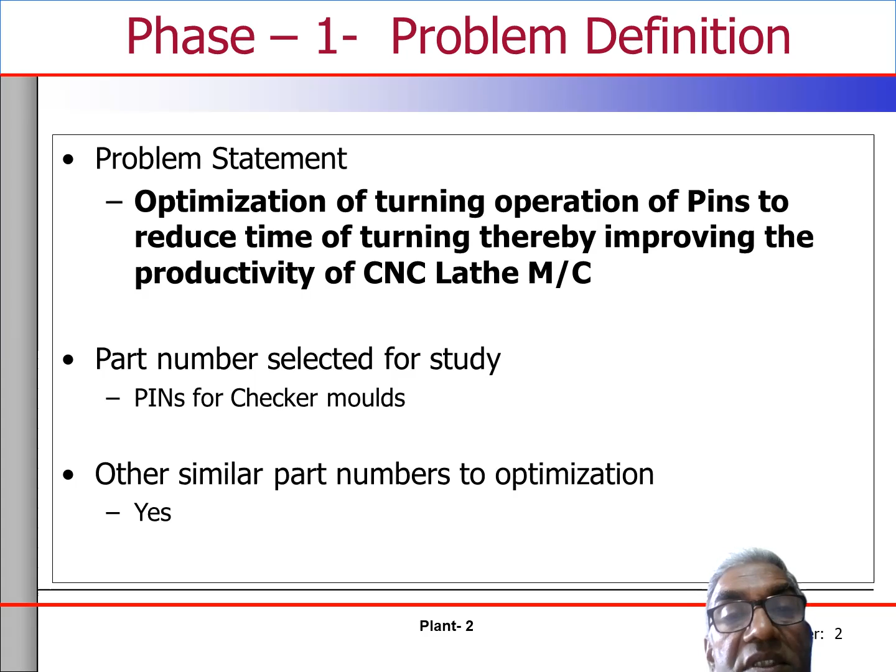So what is the objective of the project? It was optimization of turning operation of pins to reduce time of turning, thereby improving the productivity of the CNC lathe machine. We were manufacturing these high carbon, high chromium pins for our plant, done in a CNC machine. However, this turning operation was taking a long time, so it was decided to take up this Six Sigma DOE project to reduce this time so that we are able to meet the daily requirements of pins for that operation. A little later I will explain what these pins are.

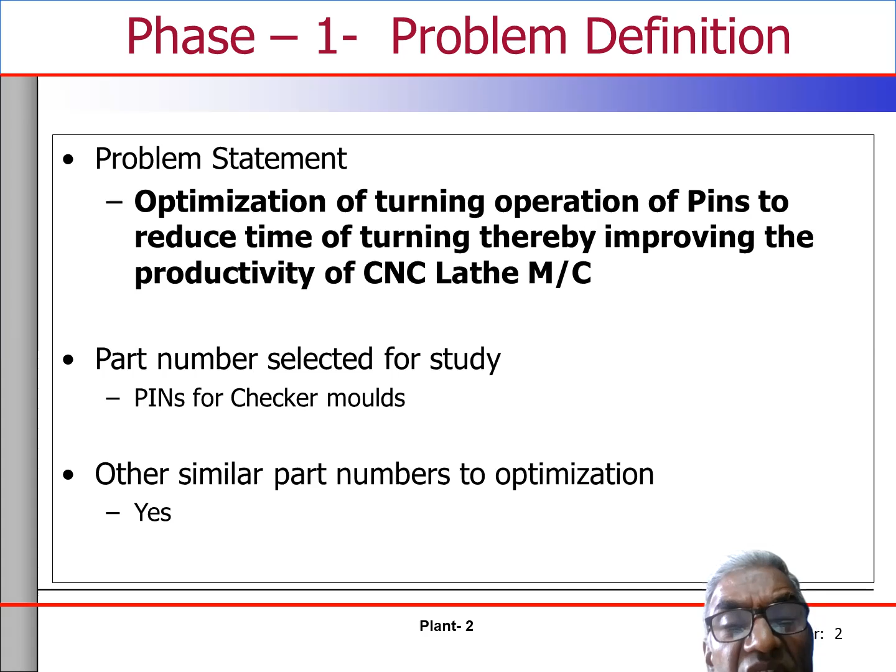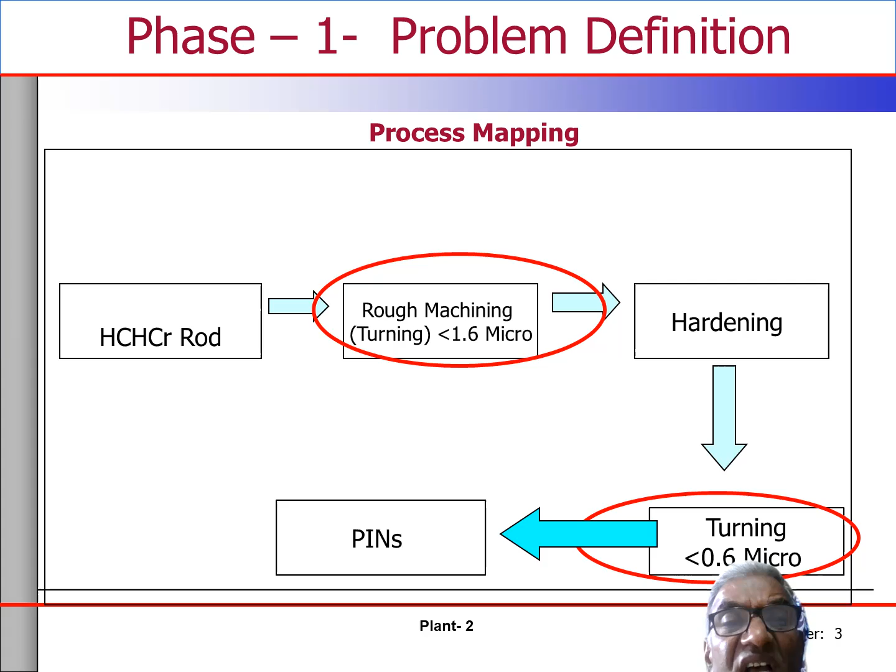So if you see this process flow: high chromium, high carbon round bars will come, that will be cut into pieces, and first rough machining will be done, with the requirement that roughness will be less than 1.6 micron. Next it will be hardened, and then again machined, where the surface finish requirement is 0.6 micron, and then this will go for use up to the machine.

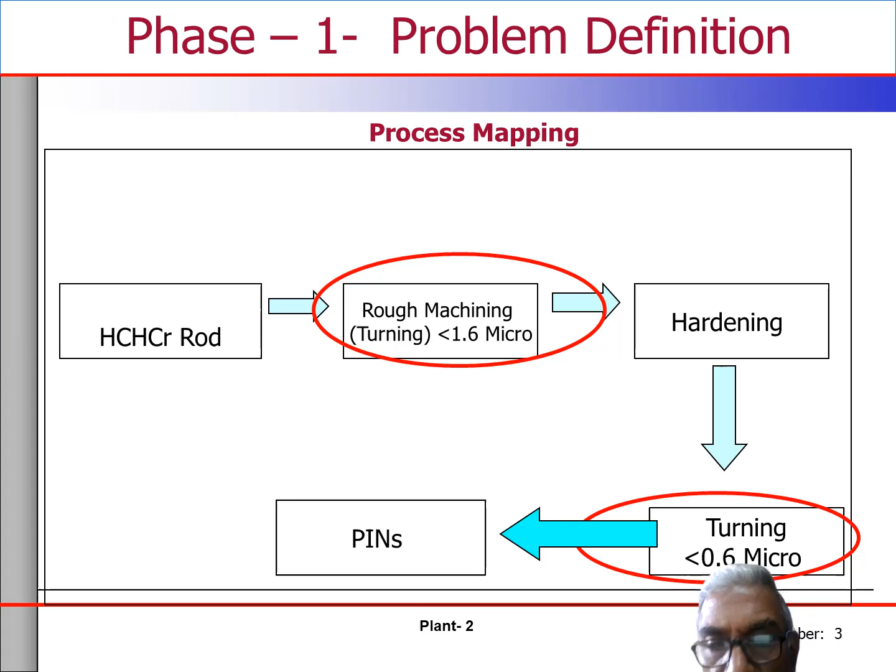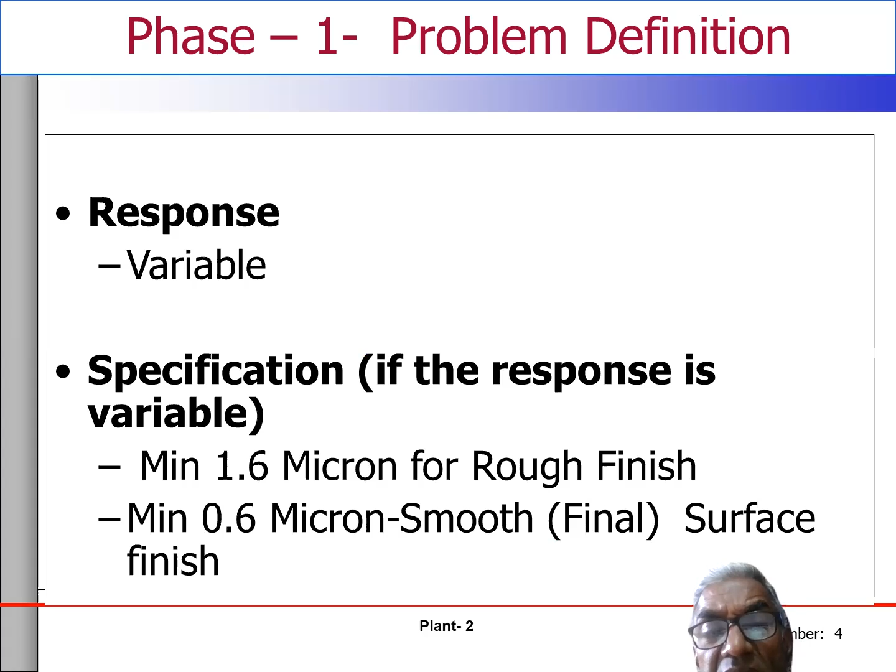So this response was a variable response. What was the response? The roughness of the product. For the rough finish, it was 1.6 micron, and for the smooth finish, it was 0.6 micron.

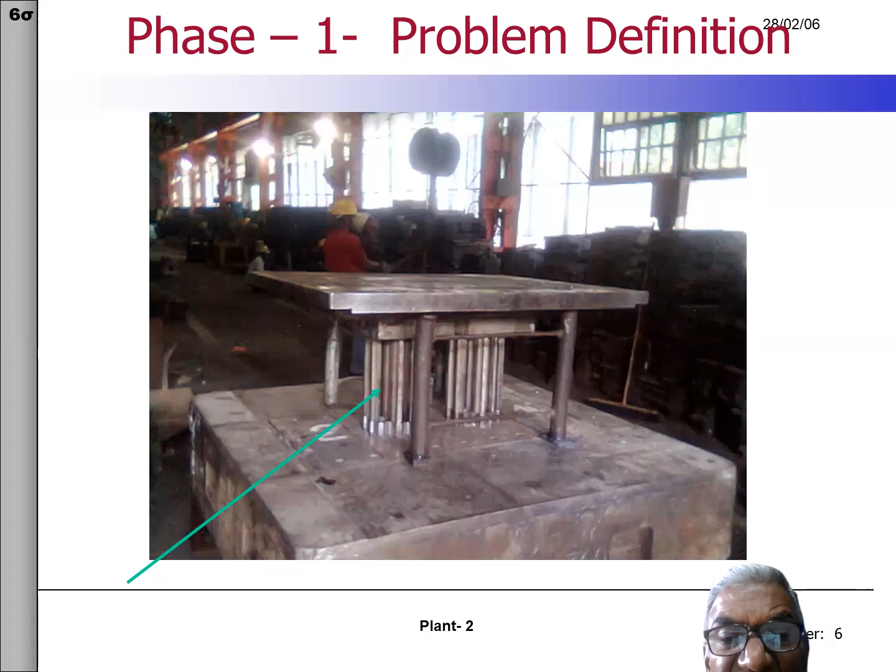And these are the pins you see, these are the finished ones. These round pins, or round bars, are fitted into steel molds, and this bar goes inside the mold so that the bricks being made will have a hole. This was probably an 18 checker High Alumina brick used in the refractory plant. You see this assembly here.

So what is the process stage where optimization is to be done? It was the turning operation. There were two turnings: one was rough turning, and the other was fine turning. The earlier current value was that average rough machining used to take 35 minutes, and fine machining used to take 55 minutes.

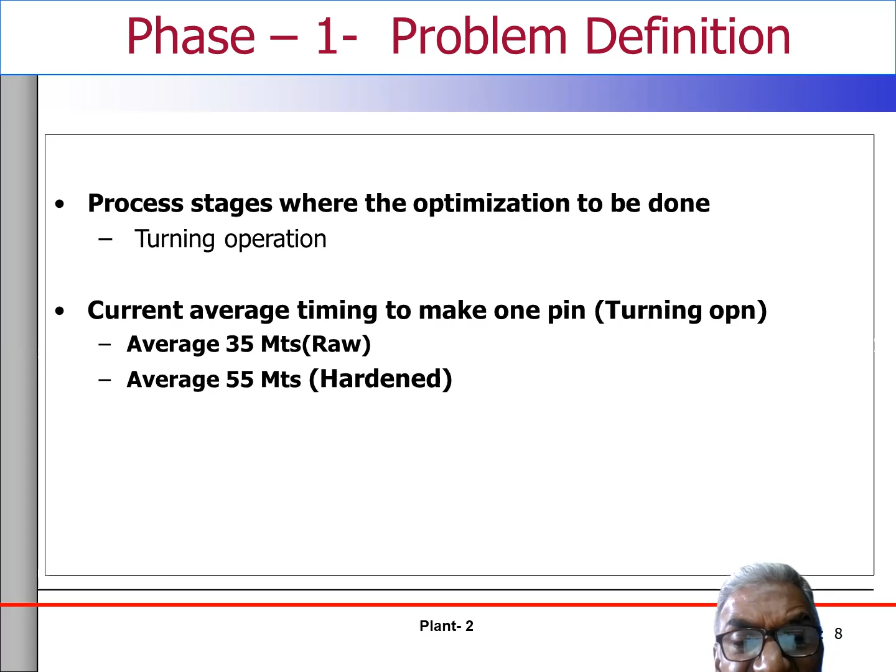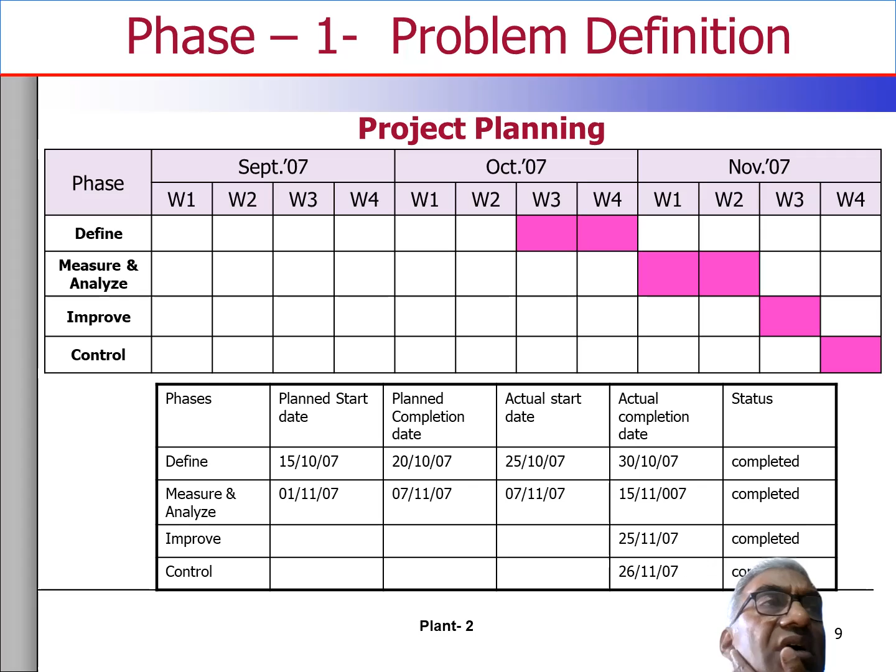This is the DMAIC phase. DMAIC means any Six Sigma project taken up is covered by this: D stands for Define the problem, then what is the present performance of the particular process or product, then make an analysis of the causes, and then you make the improvement. You incorporate the improvement based on your analysis, and then you monitor on a daily basis so that the manufacturing of the product is as per the desired specification.

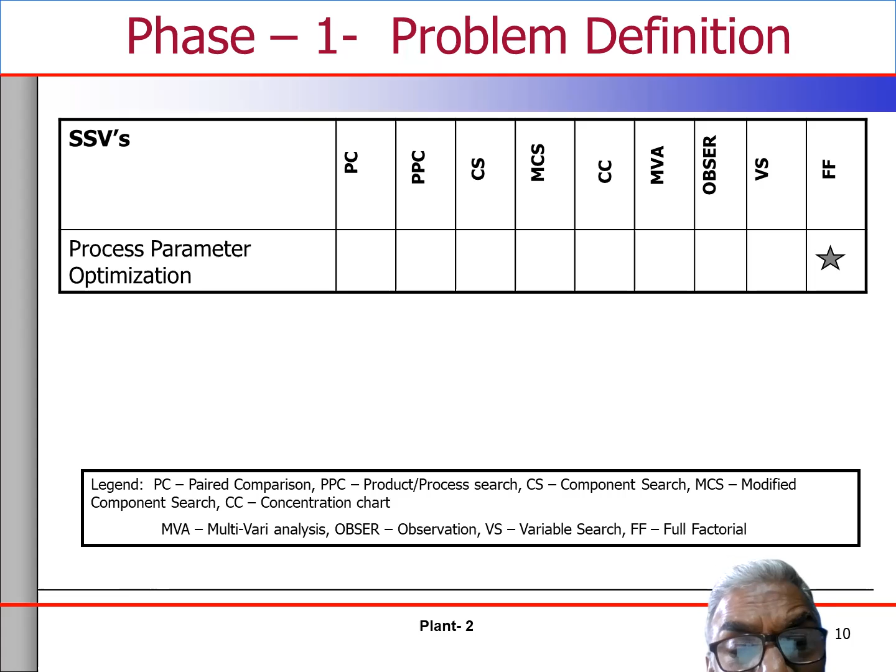So this was done with the problem defined, and we found this problem was process parameter optimization - this was the objective of the project. Process optimization for the existing process, that is turning operation of pins, to identify the contributing factors and setting conditions.

So what type of DOE would be done? We did a full factorial. Full factorial means both the variables, whatever factors were defined, the complete set of experiments would be done. There are fractional factorial, half factorial, etc., but it was full factorial - whatever factors and levels were chosen, they were all completed.

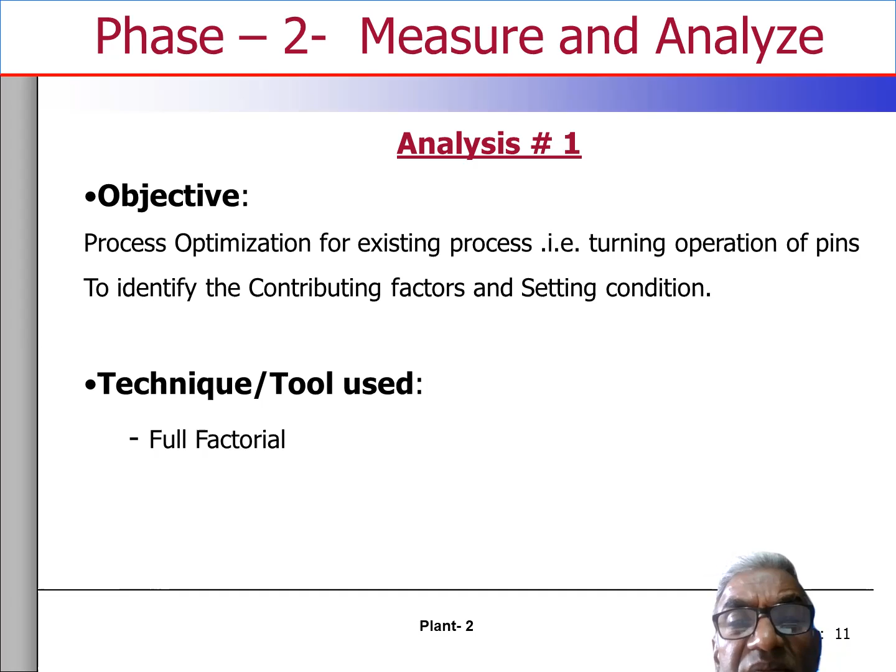So there were two variables identified. One was the job speed, the speed of the chuck of the lathe. The other was the feed, the depth of cut per revolution. These two were brainstormed as the two parameters, and now we do a simple checking procedure to see how these two are the contributing factors.

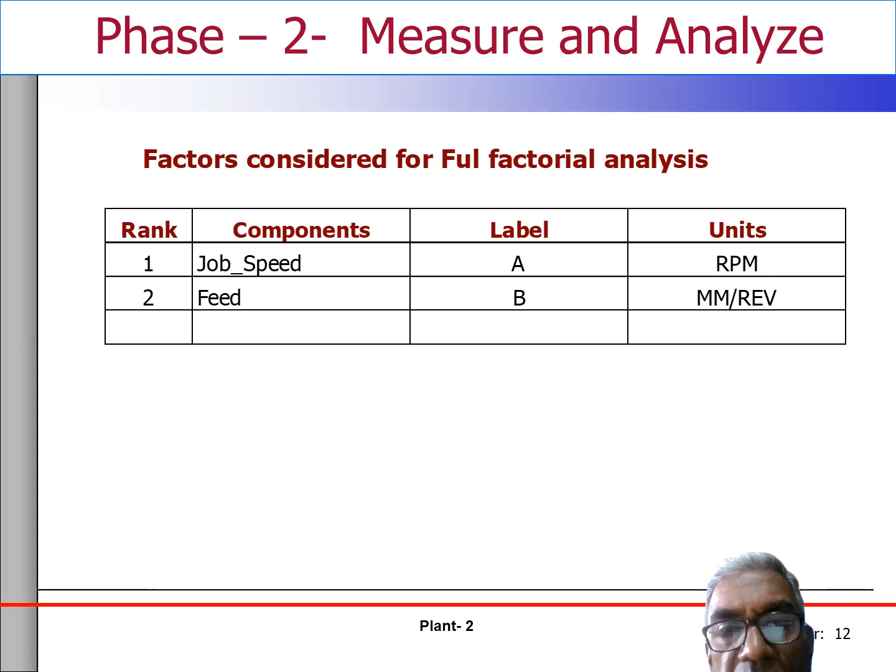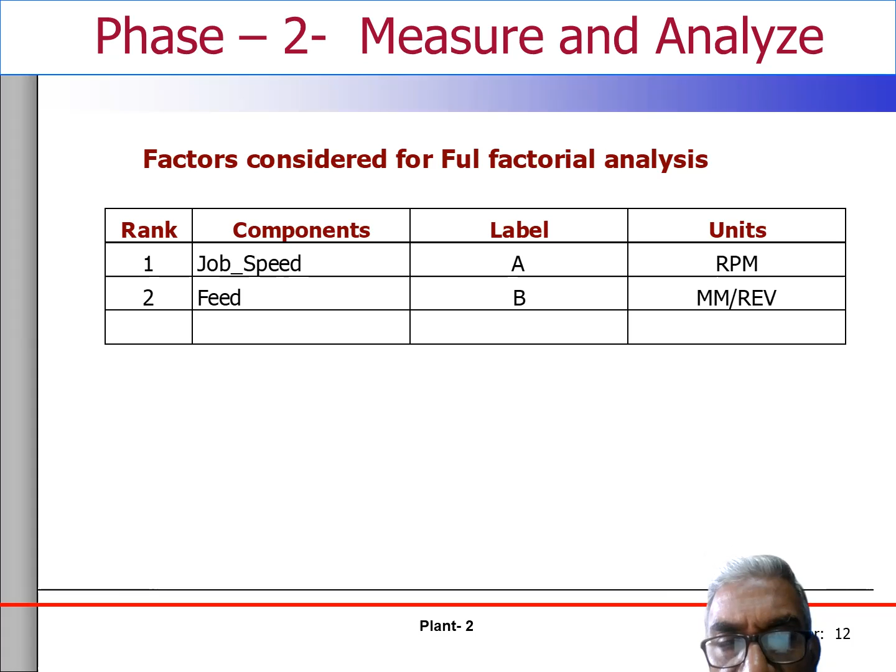There are many ways of doing it. You have to do some pre-screening, called screening experiments, like this: for raw machining, what do we do? You take 3 readings at the minus setting. Minus settings means we have taken the job RPM as 300 at the lower setting and 400 at the higher setting.

And this feed in millimeter per revolution was taken from 0.4 earlier to 0.2 now. Okay, and then we conducted for each setting, which is called negative setting because the values are lower values. So there we took 3 readings, and in the higher condition we took 3 readings.

Then you took the median. Median means which is in between, the second in ascending order, which is the middle one. So it was 4 here in this case, first case. Here it was 1, the second case, and this is the difference between the two medians. In this case, 4 minus 1 is equal to 3.

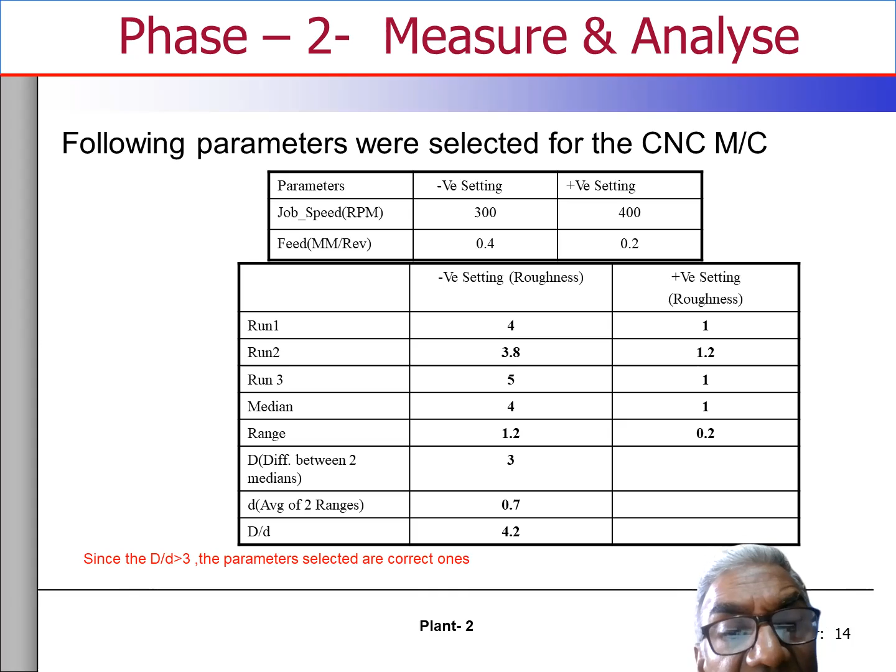So then we took the ratio 3 by 0.7, and the ratio was coming 4.2. So the ratio D by d, where D is the difference of two medians and smaller d is the average of two ranges, is equal to, in this case, 4.2. If it is greater than 3, that means whatever variables we have identified are the correct ones.

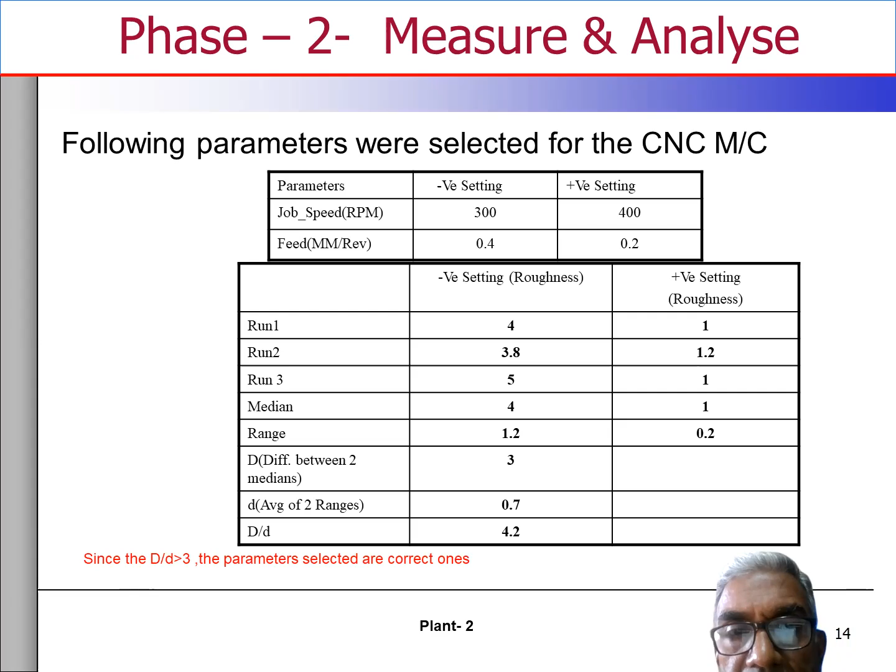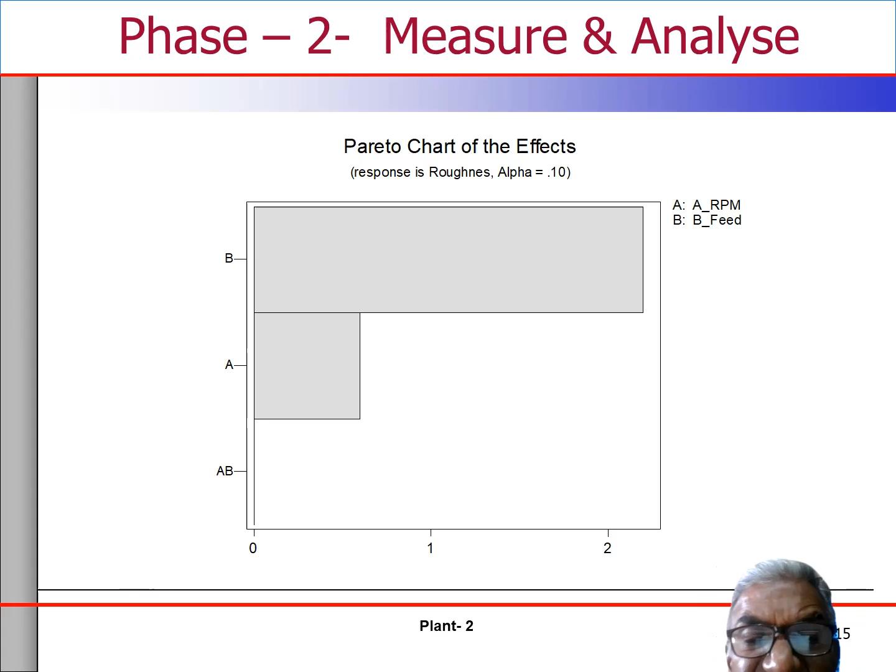And we did this contribution of each. It is a reflection of the previous one, where this is the B, and A RPM we have seen earlier here. This is the RPM we have seen. So this has got lower contribution. You can see the slope is low, so this is having lower contribution, and this is having higher contribution.

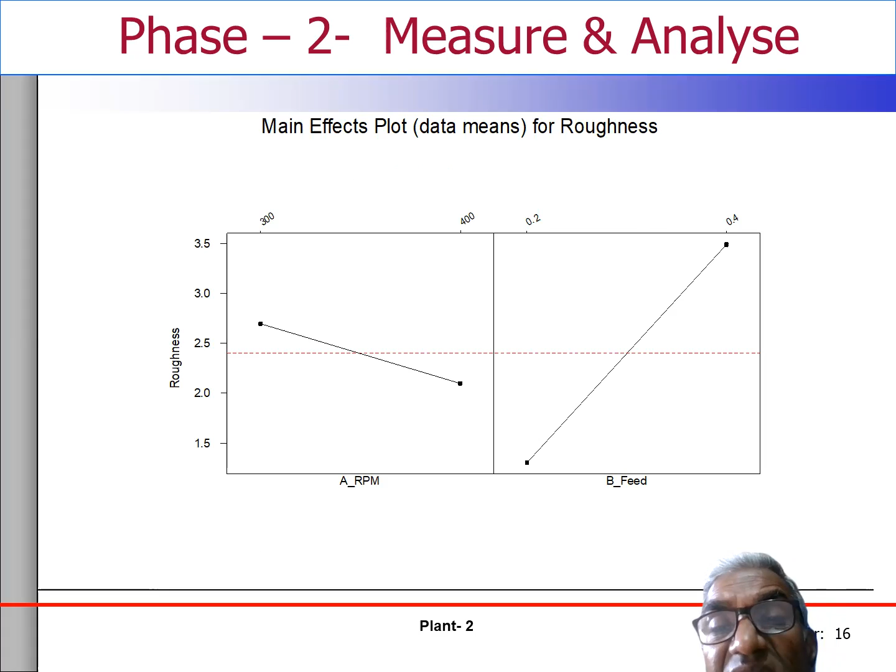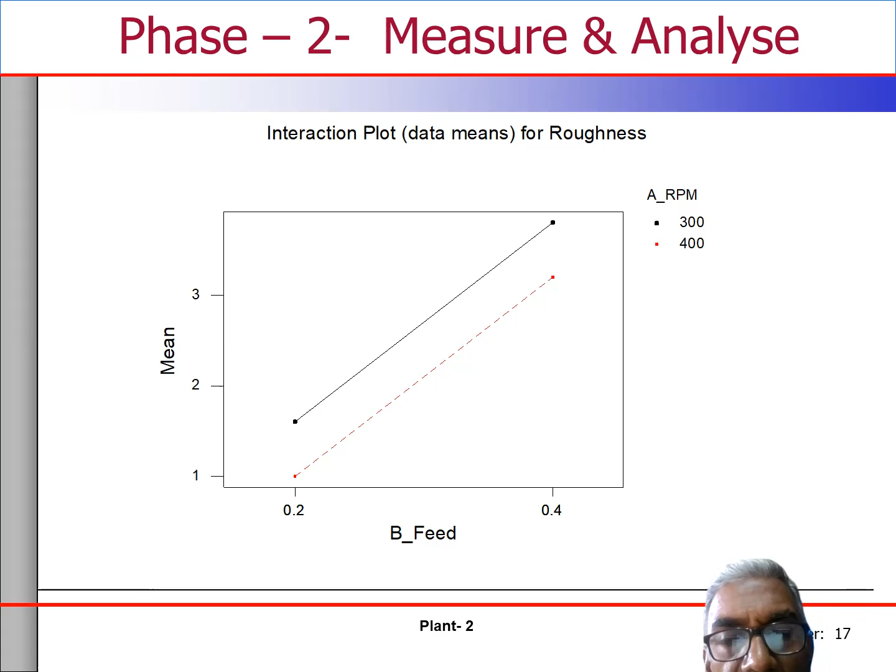And these two variables, since they are parallel, they are having no interaction. They are independent in the sense that one setting doesn't affect the other setting. Means the feed setting doesn't affect the contribution due to the speed. So feed and speed are not having interaction.

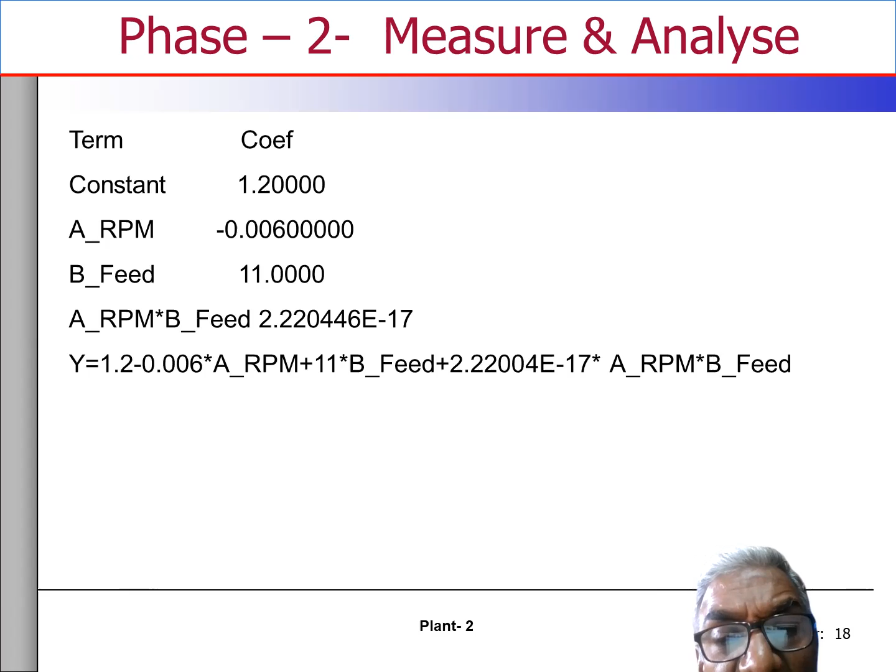And finally, from the DOE, by using Minitab, we get a regression equation, which is like this: 1.2 minus 0.006 into A RPM, plus 11 into B feed, plus 2.22004 into E to the minus 17 into A RPM into B. So it is very negligible. You see that A and B interaction has got nothing here. It is almost zero, a very small one.

So then, setting up 500 RPM, we did an optimization test, which we will be studying in the later videos. Actually, this whole project I am explaining to show what drastic improvement we can get using DOE. This is for our motivation purpose. DOE is a very powerful tool and it leads to very large improvements. So from 300, we took the minimum and did the test in 400, and now we are taking the optimum one when the time is minimum.

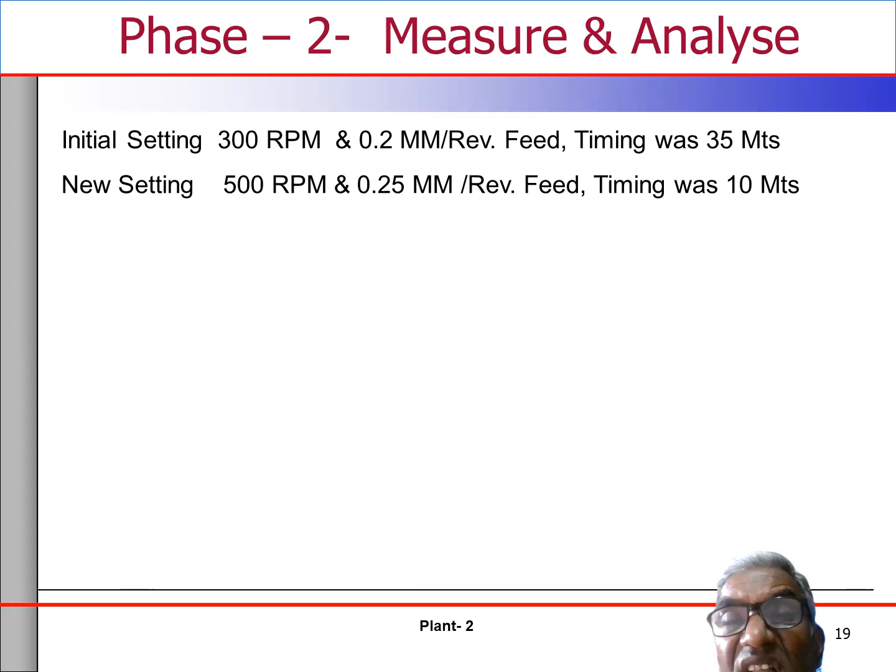And you see the existing case, the timing was 35 minutes, and you see in the present, in the newer setting, that is 500 RPM and 0.25 feed, it is only having 10 minutes. So much of reduction. So 35 minus 10 is 25. 25 minutes of reduction in the level of 35. So it is almost 70%. 70% reduction is there.

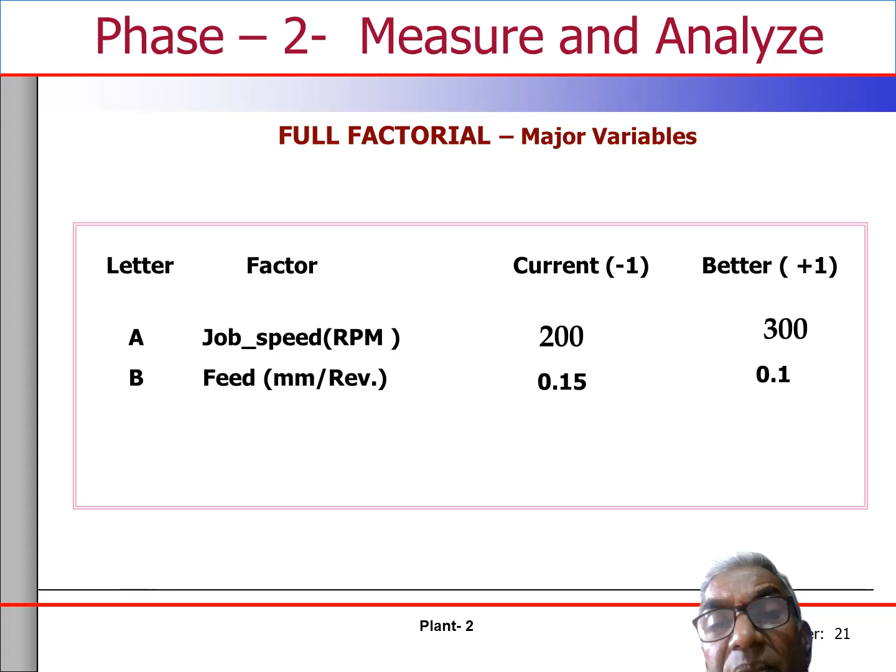Similarly, for the smooth finish, we have done this test, and two major variables again: job speed, that is the chuck speed, RPM 200 and 300. We did the test, and feed in millimeter per revolution was 0.15 and 0.1. And again, same thing we did. In the negative settings we took 3 readings, and in the positive setting we took 3 readings, and we found out the median is 0.8 here, and here 0.4.

In the second case, range is 0, because all are the same. Range is 0, 0.8 minus 0.8, 0, and here the range is 0.6 minus 0.4 is equal to 0.2, where range is equal to highest value minus the minimum value. Similarly, now D is the difference between two medians. Difference between two medians is 0.4, and this is the average of two ranges, that is 0 plus 0.2 divided by 2 equal to 0.1, and you made the D by d is equal to 4. That means it is again greater than 3. That means that these both have got contribution.

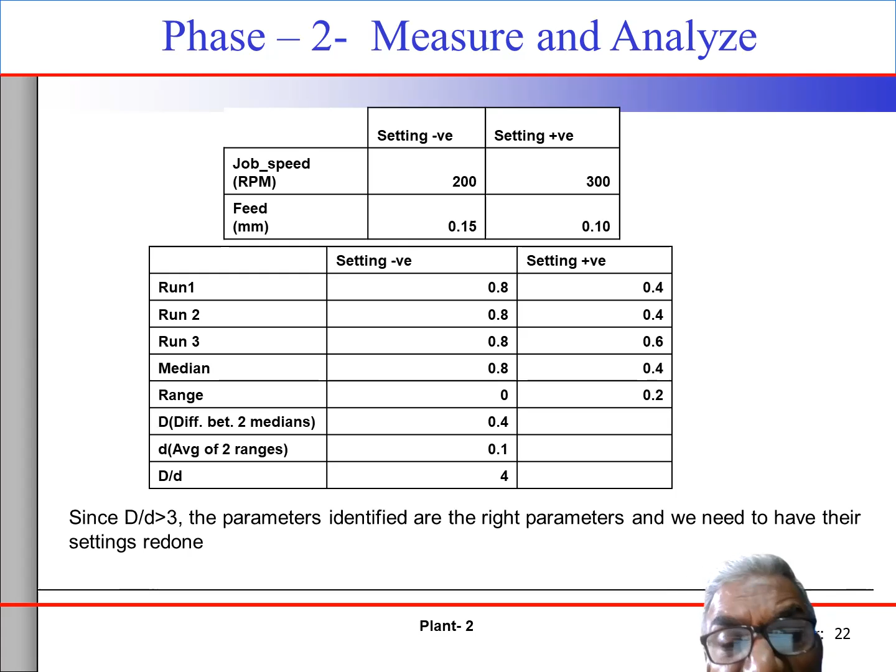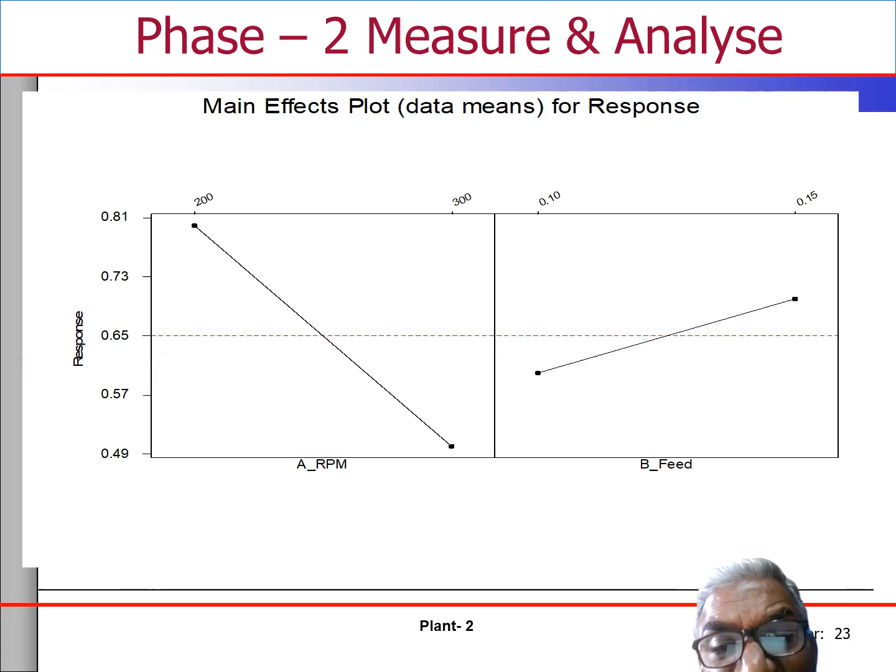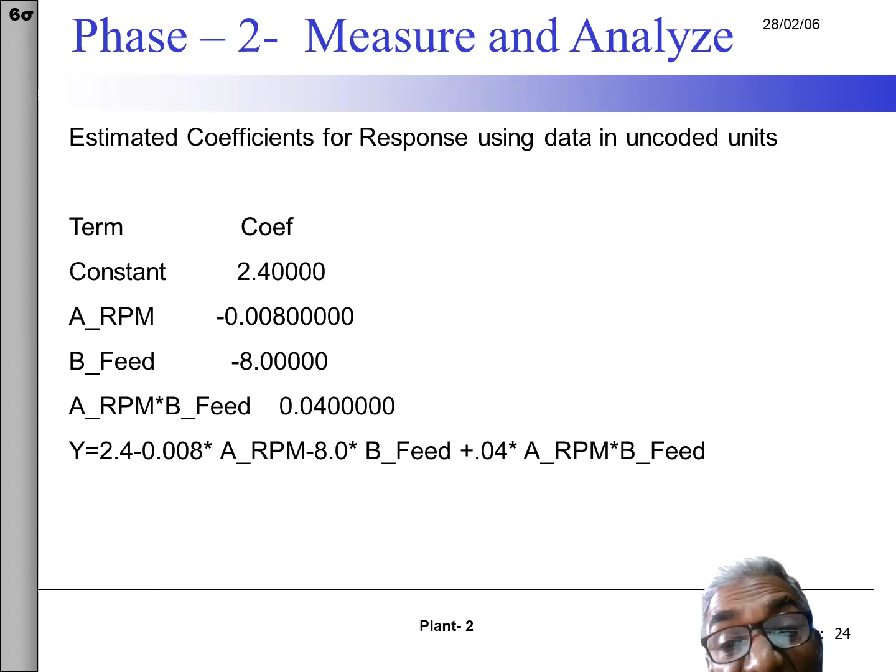Now again we saw here in this case the RPM has got a bigger contribution, and the feed has got a lower contribution. Means the RPM impacts more. That's why we have kept 300, more than the present setting, and here we have reduced the depth of cut. And again we got an equation like this, y equal to something like this, 2.4 in terms of A and B. Again here the RPM and feed were having some interactions.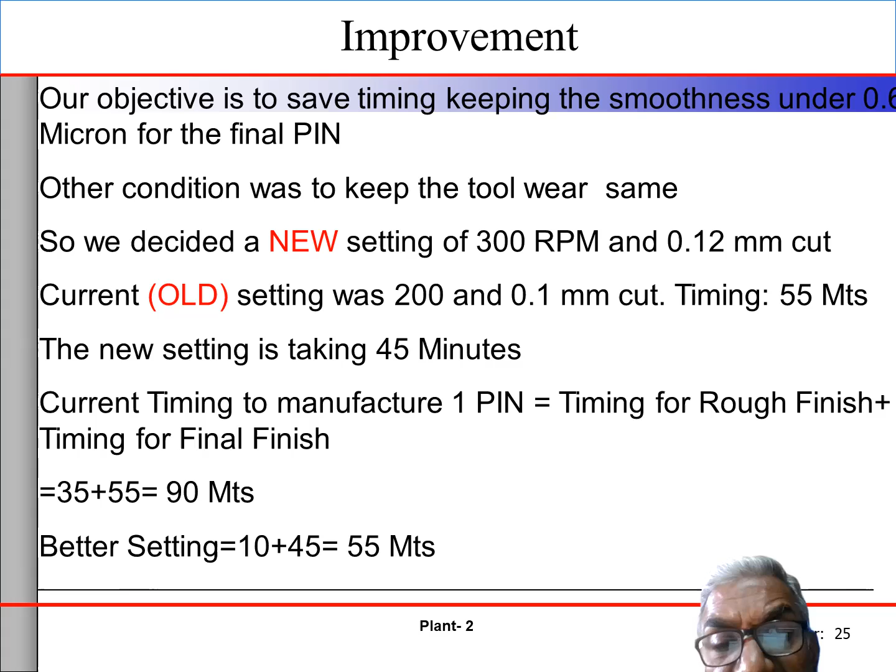So totally, earlier it was 90 minutes. Now the total new cycle time is 55 minutes. So that is a difference of 35 minutes over 90 minutes. So it was around 40%. So 90 minus 55 divided by the original 90 into 100 is equal to 38.8. So the improvement was 40%. This is a huge improvement for the cycle time.

Now, anybody who is having this turning operation can always do it. And lots of plants are having this type of turning operation. And if one does this analysis of depth of cut and RPM, it will have a huge benefit. I just showed this example as a motivation of using this DOE technique. And DOE technique is actually the final implementation part of Six Sigma. And normally, if a right problem has been identified, you will have a great saving.